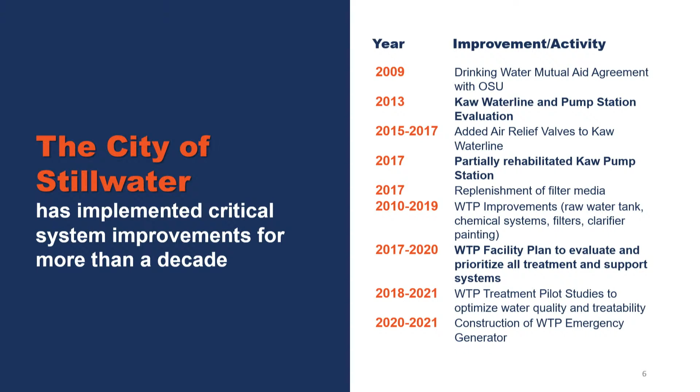So those together kind of bring us to the stage we're at now, what we've been calling project definition. Spring of 2020 is when we were working on a program of probably $50 million worth of improvements at the water treatment plant. And that's when Monty said, hey, this asset we're investing that much in is 40 years old. It's time to step back, take a longer view, and make sure we're on the right track. So that started spring of 2020.

We visited you all in September with a briefing on that approach. And then again, this past June, asked you to approve the contracts for Carollo and for Burns and McDonnell. And now here we are with an update of where we are with the project definition phase, and to tell you a little more about what we're calling project definition.

So it's the opportunity to decide how to optimally reinvest in the water systems rather than letting a future emergency drive things for us. Also to look far enough ahead that we don't find ourselves on a dead end and need to expensively change course. Going back to Monty's illustration of driving to Colorado, we don't want to get to Topeka and find out there's an ice storm on I-70. We'd rather find that out before we leave, and we can go through New Mexico.

So back on to challenges. We face challenges with the water systems regularly, and we've been managing the assets for years. So the winter storm in February of this year wasn't particularly novel. It was unprecedented, but we're used to facing challenges. That's my point. But it's good as an example because all our customers, indeed all of you, everybody is familiar with that because we heard about it on the news. We all were affected to some degree or another.

We came very close to losing water pressure in parts of the system. The root cause of that was essentially seeing summer demands. We were over 13 MGD in demand, which we had not seen in the last 2 summers at least. So that was greater than most of our recent summer peaks, in the middle of winter, and exacerbated by cascading events like the freeze. Kaw pump station froze twice for short periods, and one of the treatment trains at the water plant froze briefly. Neither of those were catastrophic, but pile them on to what was already a tough situation, and you have cascading events.

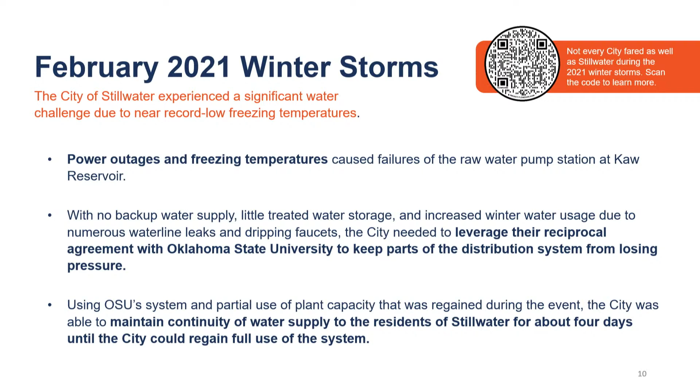Thanks for adding that in. And the QR code, if you wonder why it's there, if anybody's seeing this handout on paper, they can snap a shot, but hopefully you could on your screen. If you could pause your screen, I would think you'd be able to do it there too if people want more information. Technology. Exactly. It does? It does. Oh, good, thank you. That's right.

So as I said, we'll have more detail from Tom and David about the treatment plant and raw water. What I've got here is just a couple of slides reiterating some of the key information about the water treatment plant on the left, on the blue side, and then some of the challenges on the right that we'll have with this particular system. We do know that equipment failures are inevitable in a lot of ways at the treatment plant, in the distribution system, on the raw water system.

We have redundancies. The biggest pump at the raw water plant at Kaw has a spare just like it. So there's two pumps sitting there, and if one goes down, we've got another. So we've got a lot of contingencies to address equipment failures, and what we work really hard to avoid is a systemic failure, so that if, say, one pump station goes down, hit by lightning, tornado, whatever, another pump station in another pressure zone can support that. Maybe not 100%, but at least keep people with enough water to bathe and cook.

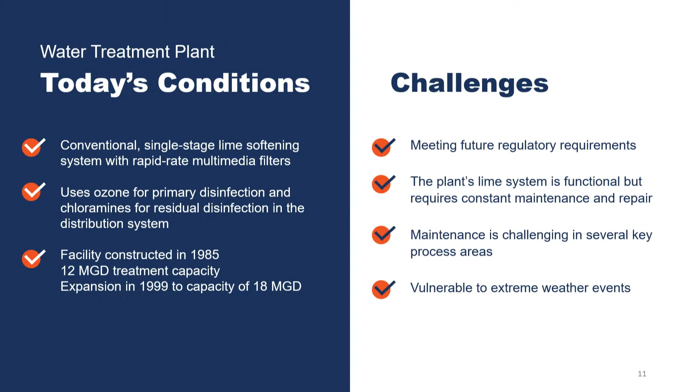And here on this slide, similar details about the raw water delivery system. Just factors about the system and some of the challenges that we've got to deal with. And I would add that that's probably the least resilient part of our system, because it was so expensive. We've got one pump station, one pipeline. So if either of those goes down, we're building up backups over the years. An agreement with OSU provides some support for that eventuality, but it doesn't provide 100% backup.

Our raw water storage at the treatment plant is only 4 million gallons. Sounds like a lot, but since even in the dead of winter we use 5 to 6 million, that's not much storage. So those are some of the limitations there.

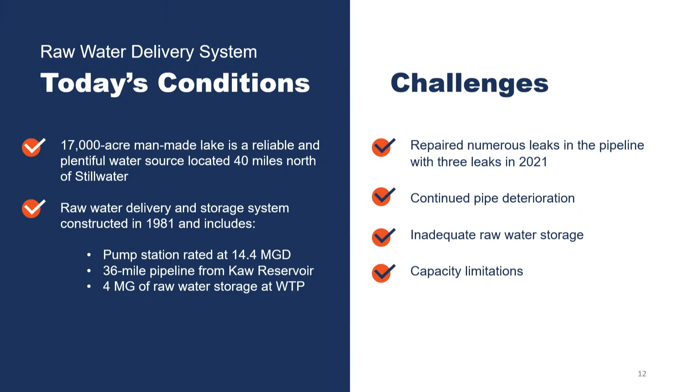Here I have distribution, and we're not addressing distribution with this effort, but it's worth including for a couple of reasons. One, distribution is closely impacted by the water quality that we put out at the water treatment plant. So we have the opportunity, when we make improvements there, to make a real difference even out into the system. You can see there on the right, we have customers 25 pipe miles away from the plant. So that's a long time to keep the disinfectant residual fresh, and to keep the water quality as good as possible and as stable as possible.

The other key thing I might point out here is that there on the bottom left, we serve in one way or another 15 plus total systems. So it's not just Stillwater depending on the raw water delivery system and the treatment system. We have raw water customers, Otoe-Missouria Tribe. Besides, we serve 4 rural water systems, but some of those serve multiple other systems subsequent to us. And some of them are just backups. They don't depend on us all the time. But so that's over 70,000 people impacted by our systems.

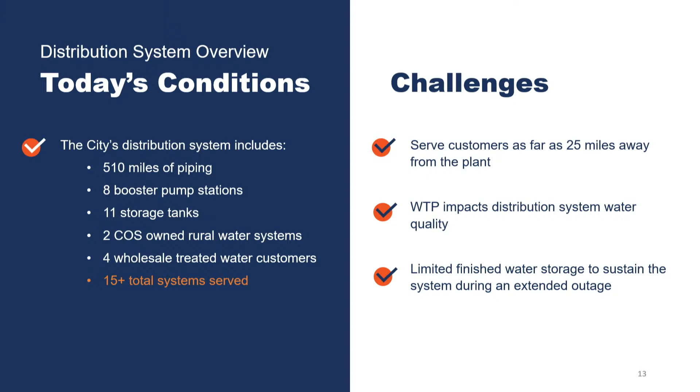And now we'll switch and talk in more detail about the water treatment plant, and I'll turn it over to Tom Crowley. Thank you, Bill. Mr. Mayor, Council, thank you for your attention this evening. I want to acknowledge our teaming partner, Burns & McDonnell, who was very integral in all of this work.

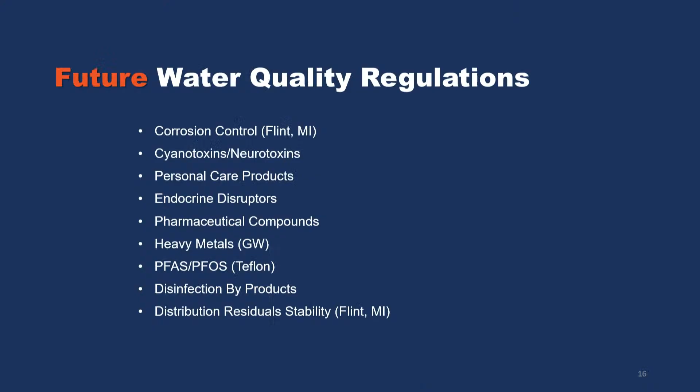One of the other things you might look at in a fatal flaw is, for example, this technology is great, but it's never been applied at this scale before. It's down here at the 1 million gallon a day scale, and we were looking at 24. So if we don't have a technology that's been applied at that scale, we eliminated it based on a fatal flaw.

Another example might be granular activated carbon. A lot of communities are starting to use that as a kind of catch-all for future regulations. One of the things we analyzed with your water is the life cycle of that GAC, and it didn't make sense from our standpoint, from an extreme cost standpoint, so that was eliminated. So extreme costs, never been operated at that scale, never been applied before - that type of fatal flaw is what was used.

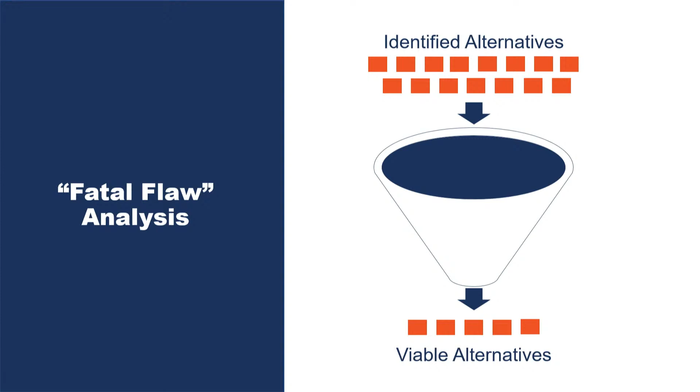So now we have our 3 alternatives, and I want to define what those are, and we'll go and show kind of overviews of what it looks like at the plant. So the first option is looking at a full plant replacement, where we take all of the key processes that are at the plant right now and replace them with a modern design, a modern treatment concept.

The other one is, hey, let's take what you have at the existing plant and bring it up to modern standards. Let's invest some money in what's already at that plant so we can meet those future regulations and our water quality goals. And then the third one is kind of a mixture, where we select the ones we think will work well with a new treatment technology or be able to be integrated with a new technology. We call that our hybrid alternative. So I'll show you what each one of those looks like.

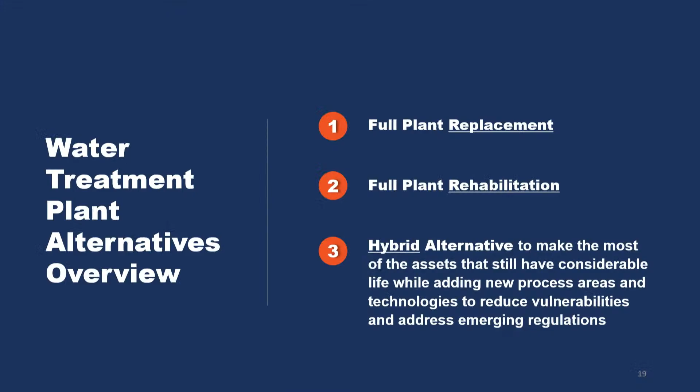So for example, in this option we would provide a new treatment train, meaning a new treatment process with new filtration and ozone, and a repurpose of the existing clarifiers for backwash for those filters. We would also include a new softening process, which has a distinct advantage over the current softening process, and I'll go into a bit of detail on that.

The existing process utilizes lime and generates a lot of solids. It generates solids that, when dried, are anywhere between 30 to 50% solid, meaning it's 70% to 50% water. The new pellet softening process is a modern design. It's a fluidized bed reactor that generates hard pellets that are about 97% pure calcium carbonate. Monty will get into what pellet softening could bring, but it greatly reduces the volume of solids you have to handle at the water plant. So it's a more modern lime softening design.

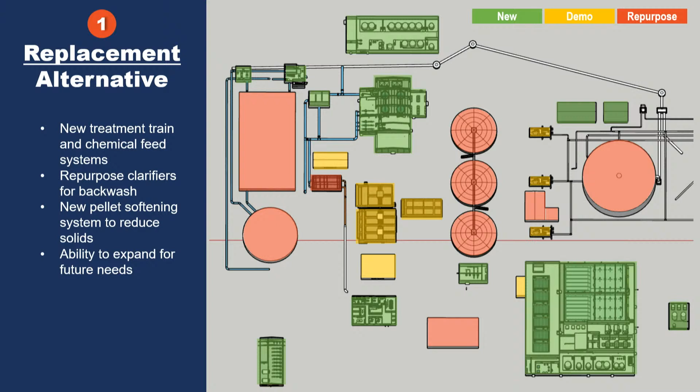So when we took a look at your filters, for example, they're structurally sound, but what's in them needs to be completely ripped apart and rebuilt—not only to bring them up to modern standards, but also to expand for access. I mentioned Thomas and his guys have to send a person down to look at the filters. Well, in this modern design, the access will be there so they don't need two or three people to go down and check the filters. It's just a modern, practical design.

And it involves a new build of a chemical feed. Again, this is still the old process which generates a lot of solids—it's a lime softening process. We're going to need a new lime feed system and ozone systems. And then, because we're pretty confined on the existing space, it's quite expensive to go from the 24 MGD to the 30 MGD due to the confined space involved in trying to reuse all that older equipment.

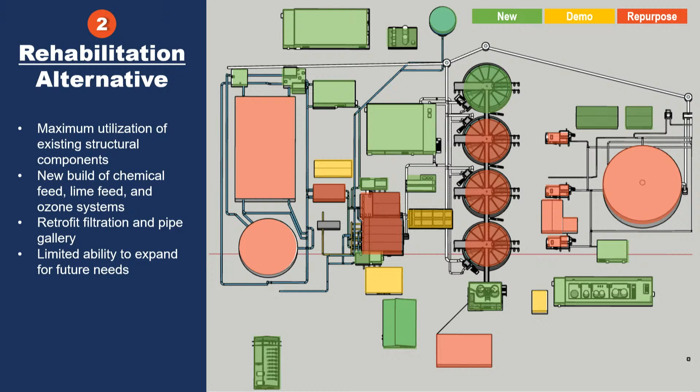It would have a better ability to expand, because a majority of the process expansion needs to occur in the filtration process, to meet the 24 to 30 MGD future needs from a 20 year to a 50 year timeline.

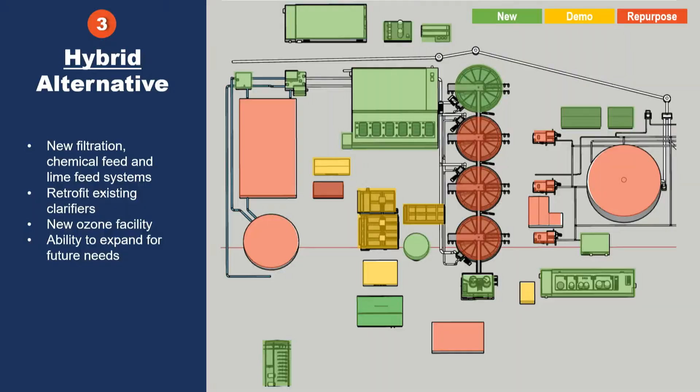Remember how I indicated we looked at benefits: water quality, flexibility, operation and maintenance, public acceptance. We scored each of those alternatives based on those non-economic values, and that is the benefit you see on your y-axis. If you look at the upper left-hand corner, the highest benefit with the lowest cost is there, and in this case that looks to be the complete replacement of the water plant.

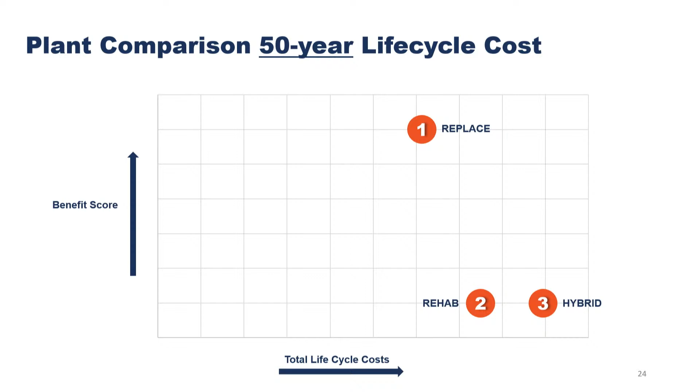So David Barth will come up and talk about the raw water system. Thank you very much for your attention, I appreciate it.

Can I just stop for a second and say, obviously I was an early childhood teacher, so pictures are great. But these really do help in the 3 different ways that you explain this to really give us a visual for what each of these plans would entail. So thank you for doing that. Very well, it was an enjoyable team to work with.

Bill mentioned earlier it's 4 million gallons. It's a large steel tank. It's a minimal amount of storage, and if something goes wrong, that's the water we have, with the exception of if we work something out with getting some additional support from OSU or having some water in our treated distribution system. But it doesn't last very long.

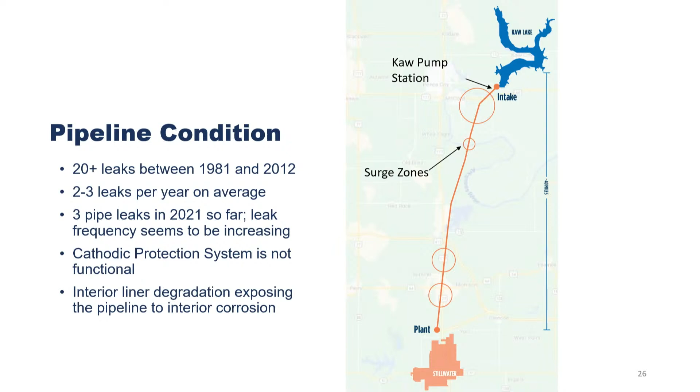So like I said, the pipeline condition assessment is ongoing. We've worked really hard this summer with Carollo and Burns and McDonnell. We've identified 11 alternatives that have various components to them, whether it's replacing segments of the Kaw pipeline, rehabilitating, let's say slip lining segments of the Kaw pipeline, or installation of an intermediate booster pump station somewhere between the water treatment plant and Kaw Lake, which would lower pressures and increase capacity.

We could rehab or replace the Kaw pump station if we needed to increase capacity. Those 11 alternatives, we're still looking at those. Burns & Mac has provided us with some costing on those, but we're still working through refining all of that data.

The other thing that we've looked at is an approach where we could institute a strategic pipeline replacement and repair program. If we had the ability to take our pipeline down for longer periods of time, and we had materials on hand and construction details in place for given depths, let's say the pipeline is buried, during an emergency or a period of maintenance, we could go out and take care of those things, either with our own staff or having an on-call contractor do it. To do that, we really need additional storage, because otherwise it gets really expensive and you're constrained to that winter time. So having additional raw water storage just makes sense for us to be able to continue to maintain our line properly and have a safe environment for the people doing that.

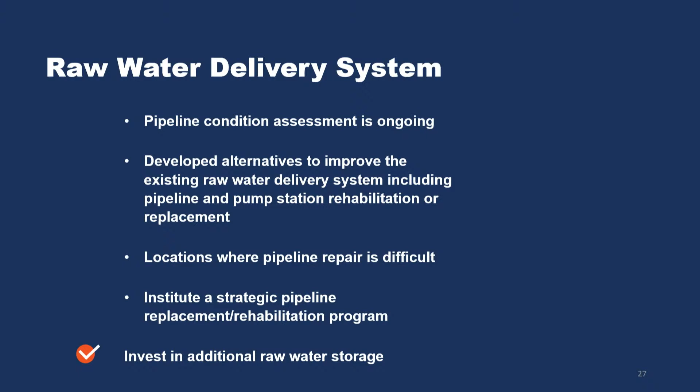That's why I've got at the bottom there, invest in additional raw water storage, which leads into this slide. We looked at different alternatives with our team, and these are the 3 alternatives that we have shortlisted.

They vary from left to right in terms of initial capital costs. Number one would be a lower cost, but it also gives you the least amount of flexibility. This is the Yost Road option, where we could build an in-ground reservoir west of the water treatment plant. You can see there are 4 cells there, so we would build 2 cells now, and then we would need to build another 2 cells to the north to meet future demand. But this would be a pretty simple way to store raw water, and it would be able to potentially gravity feed back to the water treatment plant. We would pump water from Kaw Lake through a pipeline to the west of our treatment plant into this reservoir, and whenever we need to take our Kaw pipeline down for maintenance, or take the Kaw pump station down for maintenance, we would draw water out of this reservoir.

But when it's empty, we're out of water there again. So we're limited - whatever we put in it is what we can use.

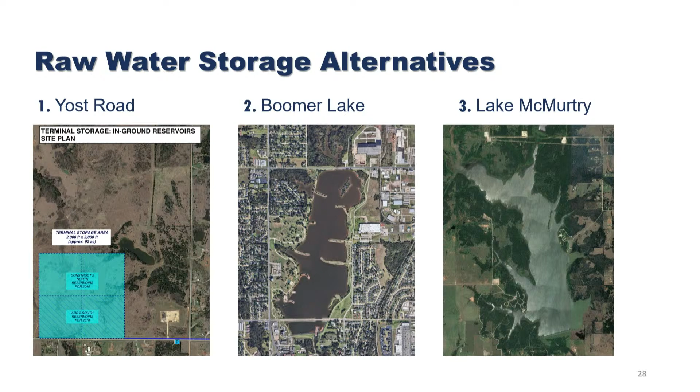So maybe if that were the option, we would look at building the larger finished water line now and then convert the existing line to the raw water line. And would that be a better overall use of our dollars over a 50-year life? That's a little more in the weeds than we intended to get, but we started there, and I wanted to make sure we address that.

I want to start off first by expressing my thanks to the team. The amount of work that you have seen tonight was done since June, since you approved this in June. So about 3 months. Normally, this type of an assessment would take 9 months and would cost considerably more, obviously, for the time.

We challenged the team and our own staff to shorten the timeline for a variety of reasons. And I was kind of met with blank stares and a lot of skepticism, and they have performed admirably. David has done a wonderful job managing the project. He has asked the right questions at the right time from the consultants. He's challenged them at the right times.

Each one of our consultants has felt free to challenge each other and to challenge staff. It has been a very productive working group, which has allowed us to do what we've done. And the key to that was the fatal flaw analysis. There's some very good treatment techniques in there that are gold standard, if you will. And we could have spent some time and money exploring those.

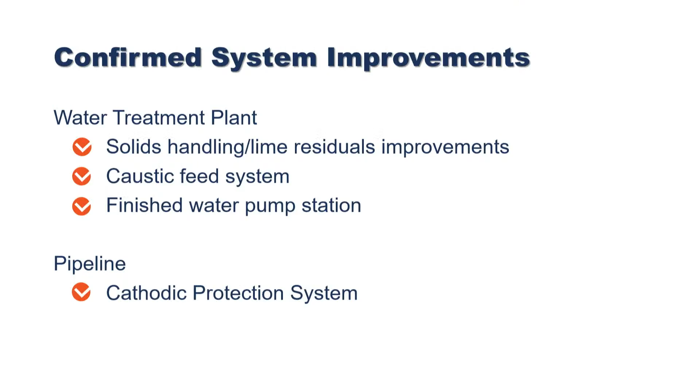Well, thank you, Monty, and to the whole team for the presentation. This is just fantastic in terms of the information and the organization and covering what are, I know, very complicated and complex systems and making them understandable to people who don't do anything with water systems except turn on a tap. And so I certainly appreciate the information at this point, and I will ask the council if they have any questions at this point.

Well, I think through the numerous discussions we've had regarding our water treatment facility and delivery systems across the last year, there's no question that we need to start getting some improvements into the works. I've had a few people comment: why are we looking at this so intently after an unprecedented winter storm? I did not realize when I started my time on council how common unprecedented events would be.

We had an unprecedented rainstorm in 2017. 2019. Oh, 2019, excuse me. An unprecedented global pandemic going on right now, and an unprecedented winter storm earlier this year. So, like I said, I think the discussion on whether or not improvements need to be made is a fairly moot point at this point. The question, of course, now is the best road forward.